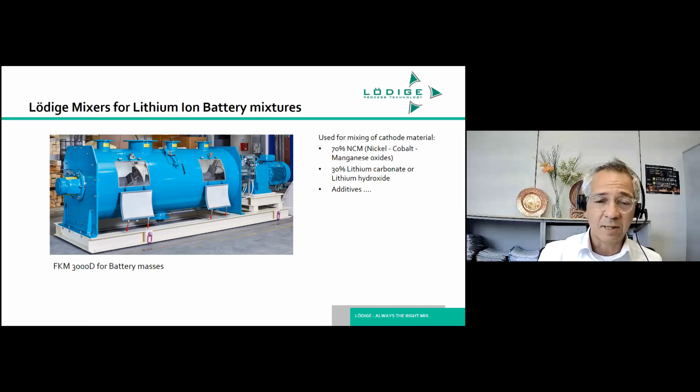Why mixing? The masses to be put together have different physical properties - some are lumpy, there are different proportions, and so on. So you need to mix in advance to get the actual mixture required for your cell production.

But for those not familiar with mixing, what is mixing actually? As Wikipedia puts it, mixing is a unit operation involving the manipulation of a heterogeneous system - that's the one on the left - with the intent of making it more homogeneous. The ideal situation is the chessboard structure shown on the right, where each particle is exactly next to a different particle, giving an optimum mix.

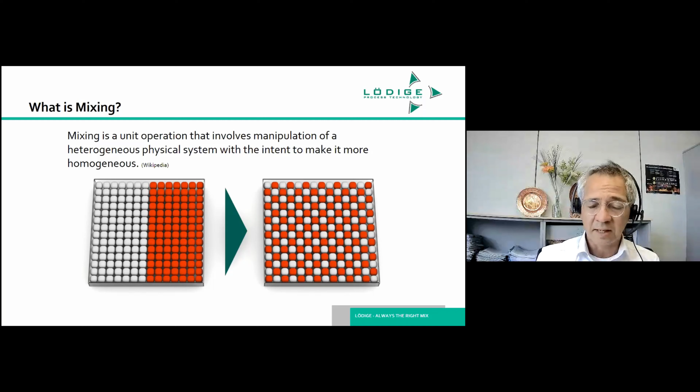But this is an ideal situation. In real life, depending on the formulation - displayed here using colored particles, red and white - looking at the upper row, you get more or less an uneven mixed state. You have more or less of certain particles in the mixture, and sometimes they're not equally distributed. This can affect your cell properties and any property afterwards for a given product.

So the idea of using mixing equipment is to get all these particles as homogeneous as possible in real life, but they won't look as in the ideal state. There can be, as you see at the bottom, a more realistic homogeneous state where it's more or less mixed ideally.

Mixing as such involves physical manipulation, as I explained earlier. This means moving one particle from one point to the next and getting this interaction. This requires energy, this requires force. By using mixers, you can manipulate these particles to spread out evenly in the complete mixture.

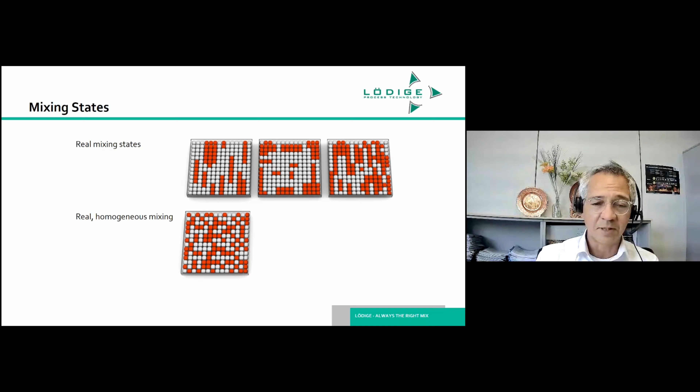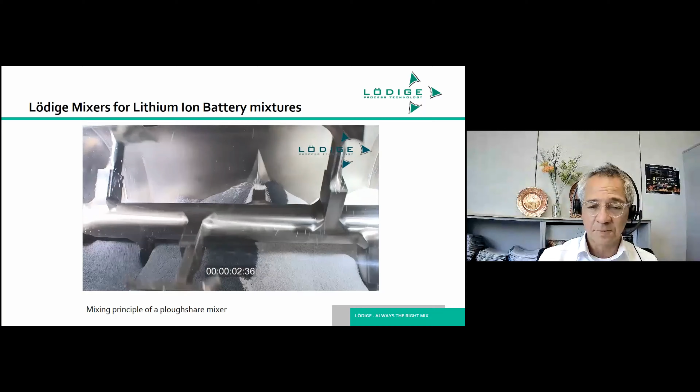Here's an example of how a Lödige mixer functions. It's a horizontal mixing shaft, on it are positioned the mixing tools. We have here a two-component system, black and white beads for simplicity, and this is where the mixing begins. By increasing speed, you get increased fluidization, particle movement - three-dimensional particle movement - and thus interaction, interchange of the individual particles, creating a hopefully homogeneous mixture at the end.

After 1 minute of mixing time - we've cut it short here a bit - you will see that the composition is more or less, from an optical point of view, homogeneous. That's the aim when using mixing equipment for battery masses or for any industry where you need to put components together.

In battery masses, upfront of what I just showed at the beginning of the lecture, there's a vast number of steps involved in the production chain, and the Lödige mixers are fairly upfront, positioned here within this red circle. Upfront of the mixer is storage and dosing equipment for the individual components - that is here, here, and here. These are all dosed into the mixer.

Then the materials are subjected to mixing, which takes a certain amount of time. After the mixing is complete, they are discharged into downstream equipment, where you get further processing. This means, for instance, filling into trays, and these trays, with their content, are passed through ovens, where the product is subjected to heat treatment.

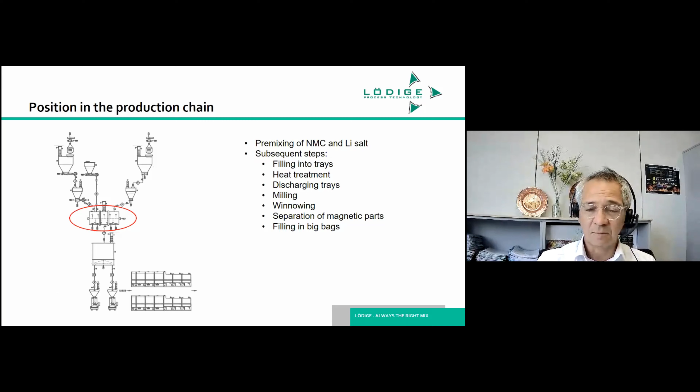Coming back to the mixer, here you see the view of a typical batch mixer. It has various features. For one, the drive and drum are positioned on a common base frame for ease of transportation and ease of installation.

On the drum there are dedicated ports for feeding the components, in this case lithium carbonate or hydroxide, with additives in the main area since they're relatively minor ingredients, and then the main components, the NCM component. Because filling and discharge requires air displacement, you have venting as well, plus inspection ports for inspection, cleaning, and maintenance, the drive unit, seal support systems, and in some cases a small sampling port if you want to do quality control checks in between, just to verify that your mixing ratio of the product formulation is correct.

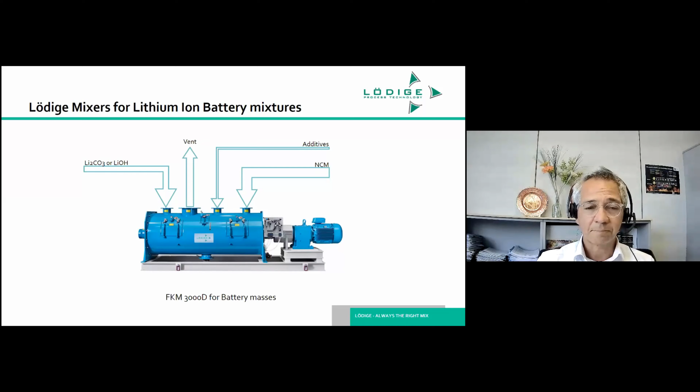These mixers for battery masses have very specific details, because battery masses require certain points to look into, and the main topic is usually preventing contamination by foreign material, which can come from the machine itself since it is made of metal, and hence we have different features on there.

In industrial applications, over a multitude of years now, 10 years or so, the sizes have established themselves to around between 300 and 3,000 liters. This seems to be an industrial standard that we observe. And if production capacities need to be increased, then the number of lines are just doubled or increased, keeping the mixer sizes the same.

Having said that, we've been approached recently with requests for even larger mixers to handle the battery mass. So there is room, there are changes on the horizon, but for current needs, 3,000 liters seems to be the benchmark. The machines inside are covered with ceramic tiles, a reason I'll talk to you about on the next slide. The mixing elements, the plowshare tools, and the shafts are covered with either oxide ceramic or tungsten carbide coating.

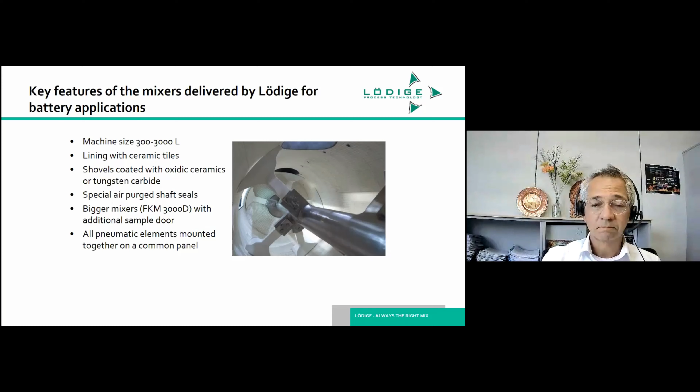Why the ceramic linings? Why the coating of all product contact parts? Well, the idea that foreign material gets into the mix to contaminate it is a very big headache for most battery producers, and so the idea is to avoid metal contamination as much as possible. It goes to the extreme that contamination has to be avoided in parts per billion, not parts per million. This means 1 milligram per ton of material of additional exterior contamination has to be avoided.

To give you a size relationship, compare a bull weighing 1,000 kilograms to a mosquito weighing 2 milligrams. The mosquito on the back of the cow is already over the allowed limit for contamination with iron.

How do we prevent metal contamination? Because the mixer is inadvertently made from metal, well, we coat the surfaces. And for the drum, it has been established over the years, testing different methods of coating, that ceramic lining seems to currently be the best option.

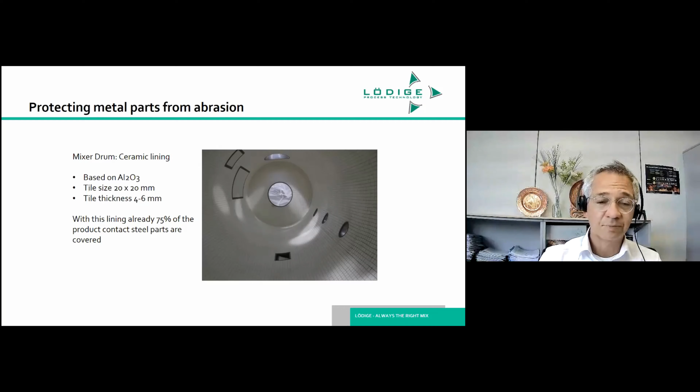But having covered the mixing drum with ceramic lining only covers 75% of what is in contact with the product. The remaining 25% is made up of the mixing elements, the shaft, and the high-speed chopper units, which are also incorporated into the machine to help distribute the individual components in the overall mixture. We've looked into and used different methods of coating. In the beginning, we looked at whether, if the drum can be coated with ceramics, the mixing tools could potentially also be coated with a ceramic layer. Unfortunately, tiling a complicated tool like the plowshare is not really a good idea.

Very difficult to keep the contour and to keep the tiles in place. So we found basically aluminium oxide coating, plasma welded application, allowing for a very thin layer of 0.5 millimeters, thus giving enough practicality to cover the mixing tools and keep the contour.

This coating is good, it's very hard, but it has one drawback, that it's brittle. And the reason it's a drawback is that you can never prevent foreign bodies like nuts, bolts, whatever, large objects, from coming into the mixer together with the raw material. And if this happens and the mixing action is there, and if these foreign objects hit the mixing tool, then if the coating is brittle, you get chances that the coating will split off and you will see the underlying metal. Again, this will provide a location for contamination.

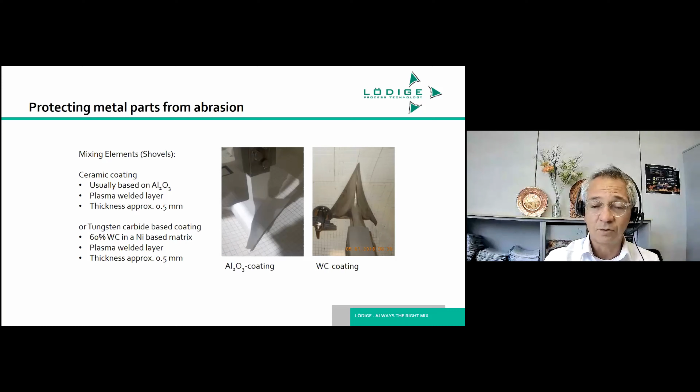So we've looked into other various options, and one option is to apply a tungsten carbide coating, which is basically 60% tungsten carbide embedded in a nickel matrix. And this again allows you, with the plasma welding, to apply a very thin layer to follow the contours of the mixing tool. And the one big advantage of this coating is that it's ductile, so the impact of foreign bodies cracking or breaking of the coating is severely reduced. And this helps then to prevent metal contamination from getting into the product.

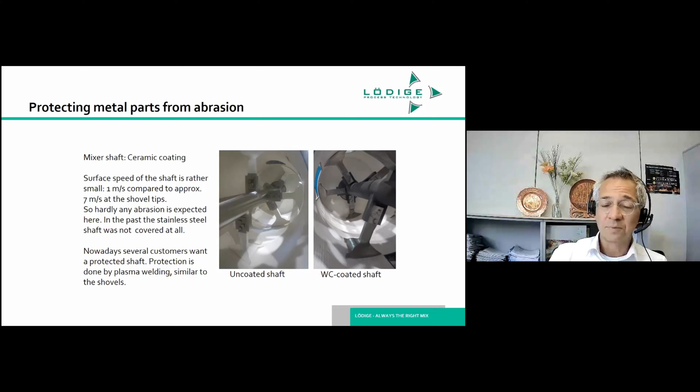But nevertheless, customers look and see where items can be optimized, and say you have one item still left uncovered in your machine. And hence this led to also the mixing shaft being covered, but in this case not with ceramics, but with the tungsten carbide coating, giving it a ductile, flexible layer on the mixing shaft, because mixing shafts, although being solid, do have some form of flexibility. So this seemed to be ideal also to cover this area of the mixer.

Another area that needed to be looked into when handling battery masses was the high-speed choppers. These are auxiliary items fitted in the area of the drum where the product density is highest, so this is the area where most friction occurs, where they do their work. These blades are again subject to wear. In the early days of battery mixing, contamination was to be prevented by preventing erosion of these items, protecting the blades with the tungsten carbide metal coating.

But unfortunately, during operation, these items are subject to wear. In practical everyday operation, you don't always get to change or exchange these blades in a timely manner, because people operate 24/7 and production is not allowed to stop. So these blades get worn, the coating disappears, and again the metal comes to the surface and contaminates the mix. So this was not an ideal situation, because one could not take into account that operators would always change these blades in a timely manner.

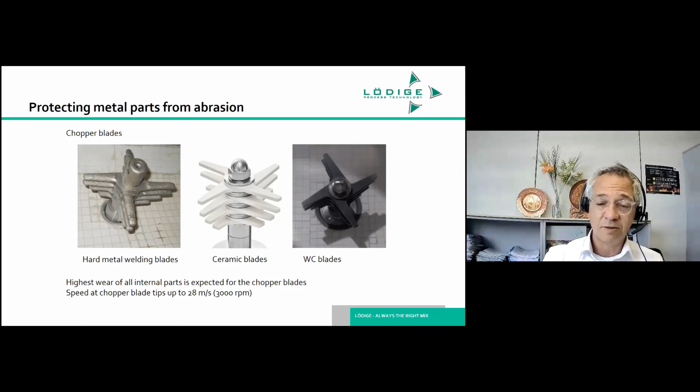But again, the more you look, the more you see details and areas where potential contamination can occur. You can see that mixing not only involves the mixing process, but also side issues which you have to deal with. And yeah, focus today is on contamination prevention.

And then customers were looking at, hey, we have here a seal. It's air purged, it's good. Air purging keeps material inside the mixer. There's no escape of toxic material via the shaft seals and amassing in a heap next to the mixer. But what about the air going into it? How is it treated? Where does it come from?

And so here again, we looked into this, and for one, we changed the design of the shaft seal to a smaller version, allowing us to use standardized bearing housings, because with other seals, air purge seals available, the bearing housings had to be specially adapted, meaning welded constructions, an expensive design. So by reducing everything, we could fall back onto a standard design available on the market. But this is going back to standard.

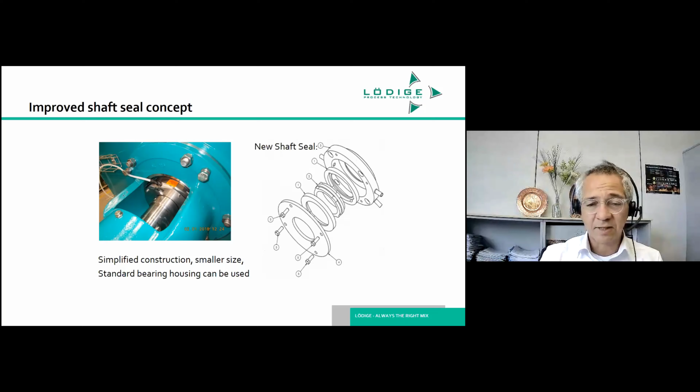But if you look at how the air is treated, you have an air control system where incoming air is reduced in pressure for the seals, the airflow rate is regulated, and so on. But standardized items appeared to have metals or materials absolutely not allowed in battery masses, and this is copper and zinc. So if minor amounts of iron are allowed, copper and zinc are an absolute no-go. So we had to redo the air service system, ending up making everything all stainless steel or polymer based. Again, a key feature when looking into mixing equipment is looking into the auxiliaries, and this air treatment is one of them.

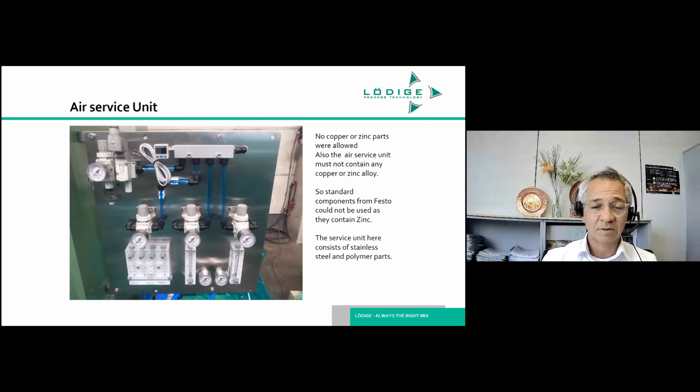That was the first mixer. The battery mass production has various steps. Up front, there is a mixing step where you have high-speed mixing using plowshare mixing equipment, relatively intensive mixing. But then downstream, you also have another step where mixing equipment or blending equipment is employed, and this is after the magnetic separation.

The reason is that during the course of the post-treatment after the first mixing step, you do get fluctuations in product qualities, physical, that you can negate and equalize by using a post-blending step after the final magnetic separation. The emphasis on the mixing is not as important as in the initial phases, where you have all the individual particles with different physical characteristics. Here, it's more a post-blending. So the mixing is slower, much gentler, but nevertheless, in terms of contamination prevention, you still have the high standards. So I'll give you an insight as to how these machines look.

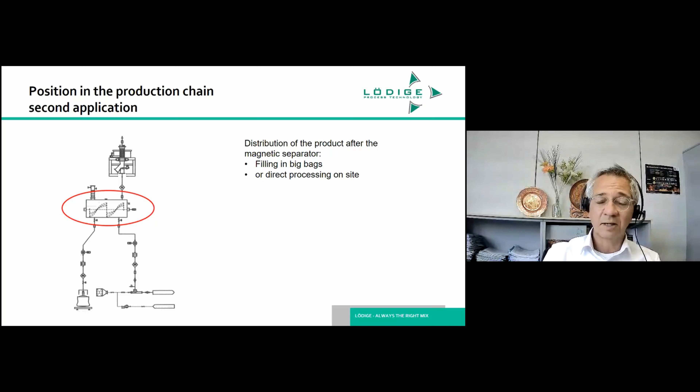Again, they have key features, one being the size. If you're using mixing equipment up front of 3,000 to 4,000 liters, then the post-mixing uses more or less the same size. Mixing action is slow, so here ribbon blenders or paddle mixers have established themselves for this type of duty, giving a much gentler mixing over time.

The emphasis on preventing contamination again shows that we have to use some form of coating on all the product contact parts. In this case, we could use a polymer coating because the mixing action is not so intensive. Hence, polymer coating, in this case polyurethane, was deemed appropriate for the task. For the mixing tools, we opted for tungsten carbide still, because the intensity was still so much that polyurethane was not deemed to be that good.

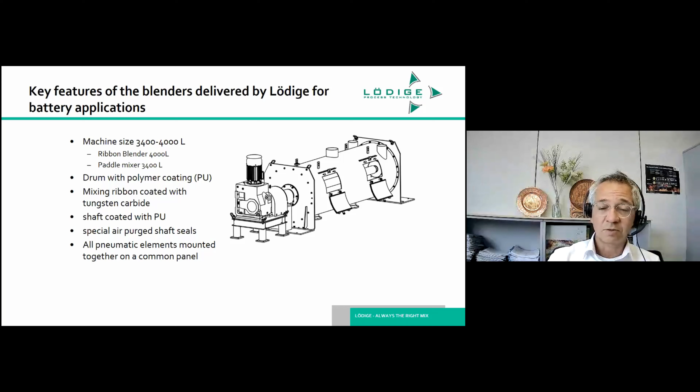The shaft was coated again with polyurethane, air purge seals for keeping the toxic material inside, and again, all pneumatic elements positioned on a panel.

Having said that, here's a typical view of a ribbon blender in this case. It's very nicely colored, so the color scheme on the outside is as the customer desires, but you can see here the mixing shaft is coated with a polyurethane coating. The drum is coated again with an orange layer of polyurethane, but the mixing tools, in this case the ribbon, have the more durable and also temperature resistant tungsten carbide coating.

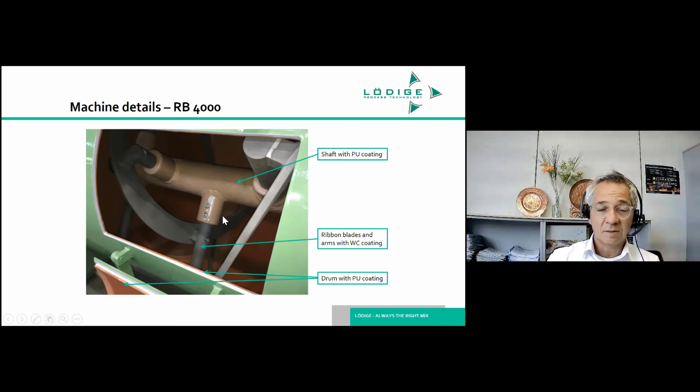So having said that, this was a more or less brief introduction into mixing of the battery masses. And you can see it's not only the actual physical mixing of the product, getting a good mix which is suitable for post-treatment, but you also have to deal with side issues, mainly the contamination of foreign bodies coming in, or from abrasion, and thus the effects of metal contamination coming inside, or even selecting suitable material components for the auxiliary equipment.